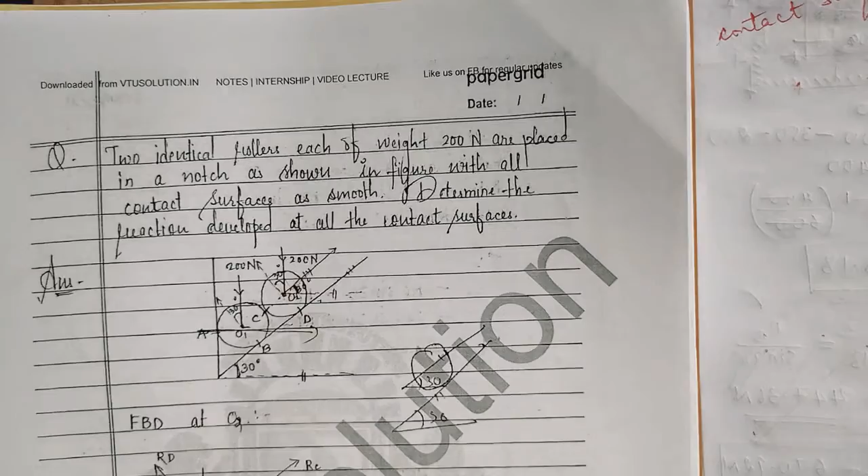Two identical rollers, each of weight 200 Newton, are placed in a notch as shown in figure with all the contact surfaces as smooth. Determine the reaction developed at all the contact surfaces.

So two spheres are there, identical rollers are there, and they are inclined at 30 degrees.

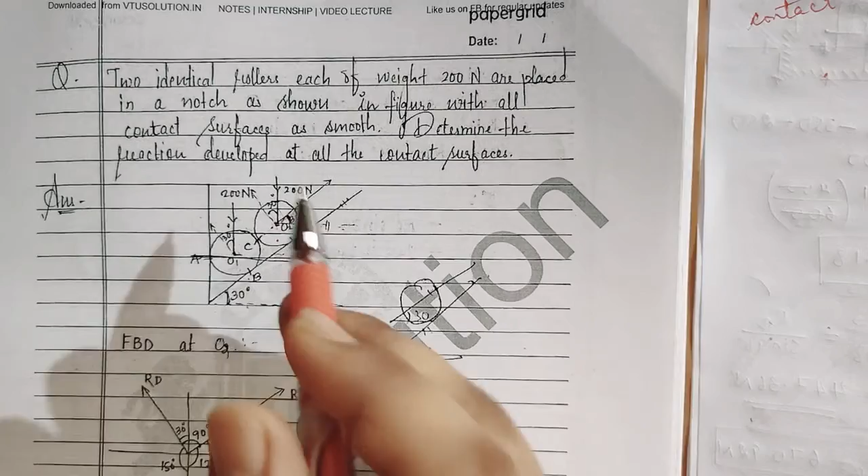Okay, so I will rewrite the figure here. So I have rewritten the figure.

So what do we have to find? We have to find the reactions at all the contact surfaces: AL contact, BL contact, CL contact, DL contact. So ABCD is the contact surface.

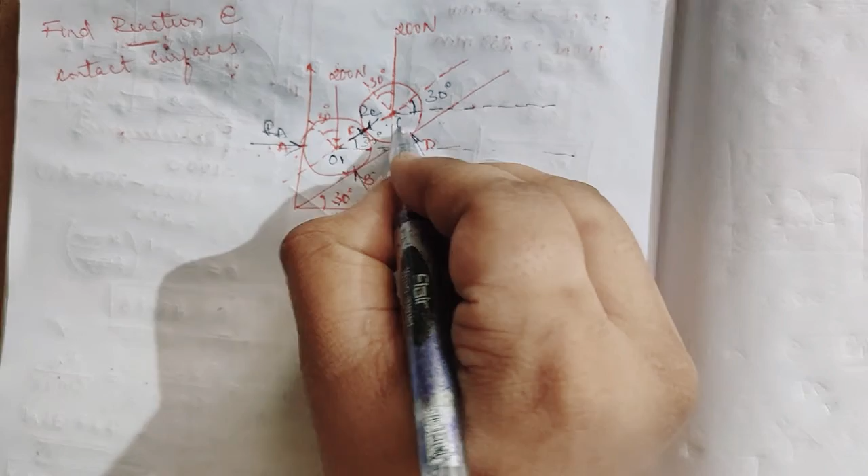So let us assume this center as O1, this center as O2. So similarly we'll take the FBD, free body diagram.

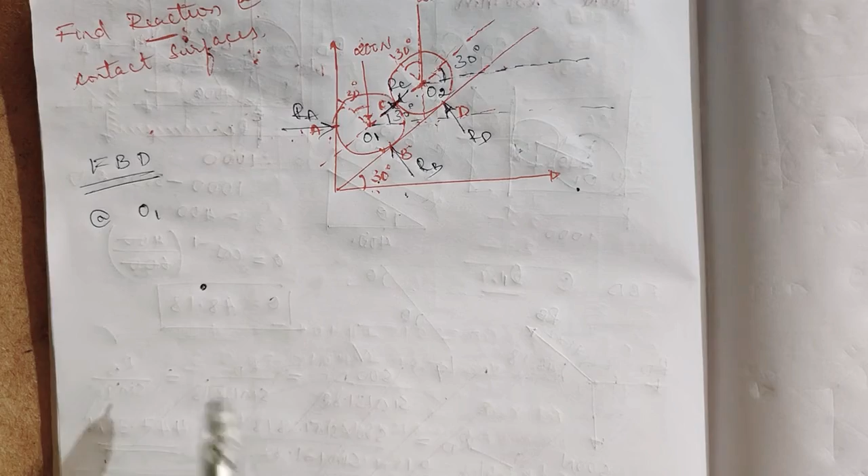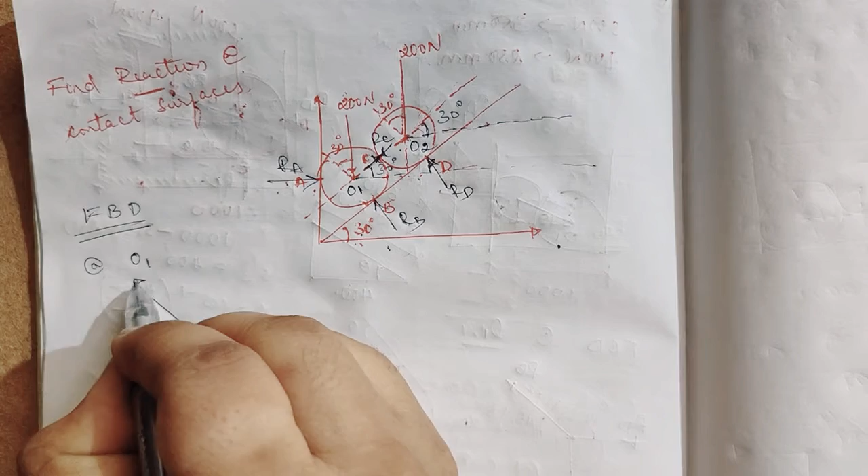First, then we will take RD. So RD, I already have one going upward, so I will take the tail here and in that direction only I will make it. So this is RD, head to tail, so only tails are connecting.

Now another force is RC. If I take RC here, then head will be connecting. So what I'll make, I'll take this RC as this. Okay, same force, what we are doing is just connecting the like terms.

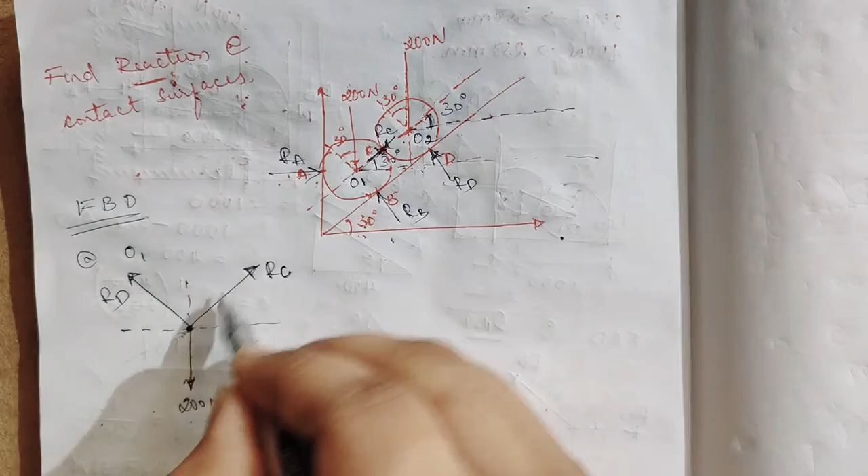Okay, now the angle—this one, RC, where is it joining? No, this is RC because it has the same centers, identical spheres. What is this angle? This angle is 30 degree. So this is 60 degree, because the total is 90.

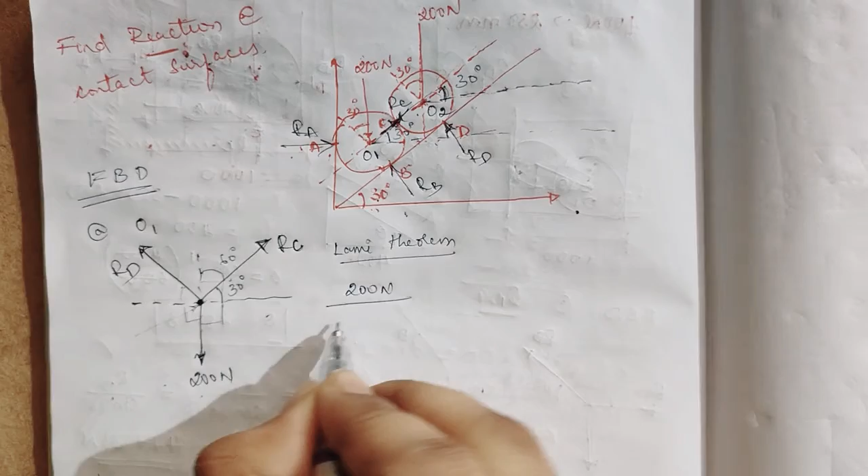What we want now, by applying Lami's theorem: this 200 Newton divided by sine of the opposite angle. We also want this angle—at what angle the weight is applying on this sphere, it is also 30 degree.

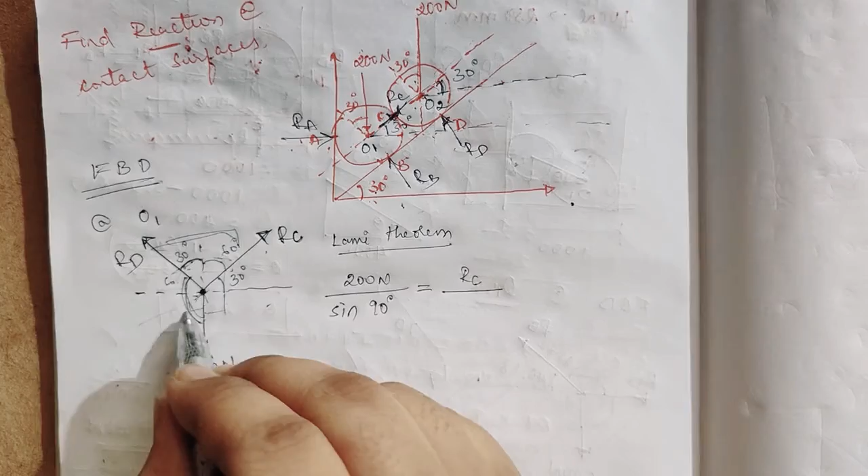So it's given 30 degree, so 30 degree plus 60 degree, total is 90 degree. So sine 90 degree is equal to RC divided by this angle. This is 60 plus 90, 150 degree, which is equal to RD divided by 30 plus 90, sine 120 degree.

Now as usual we will find RC. How to find RC? Just cross multiply: sine 150 into 200, divided by sine 90. So it is 100 Newton is the RC force.

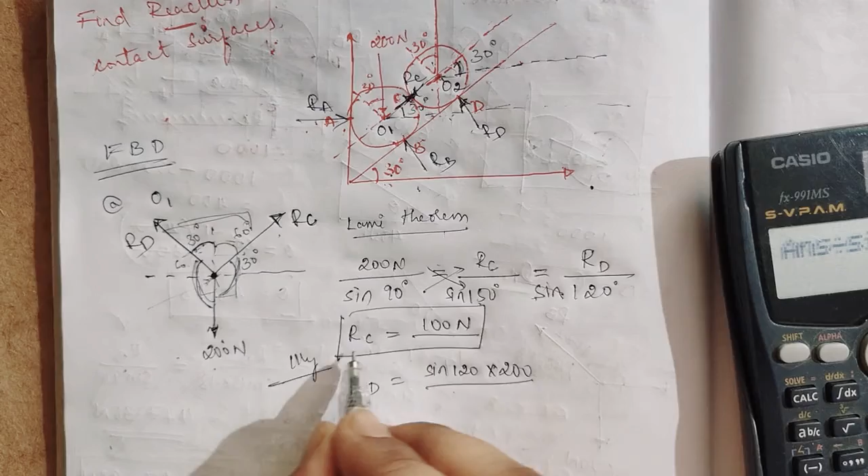So similarly RD is equal to—how to find RD? Sine of 120, please don't neglect it. So sine of 120 into 200 divided by sine 90. So sine 120 into 200 is 173.20 Newton. Sine 90 we know that is 1. So we have found RC and also RD.

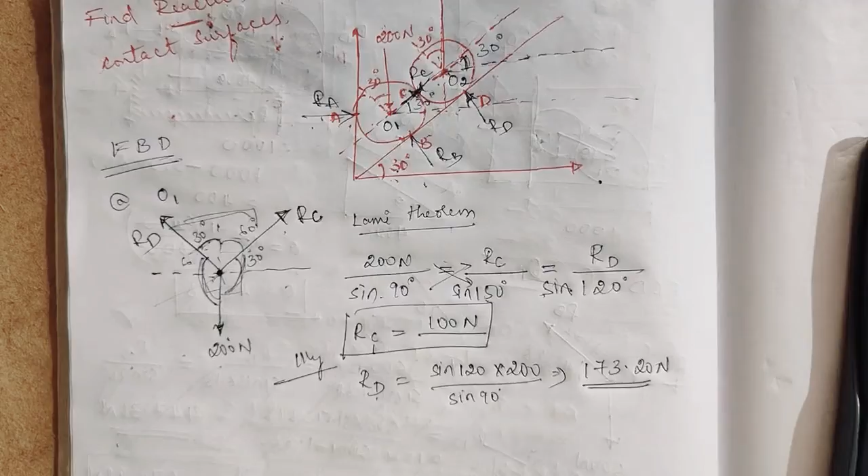Now we will take FBD at O2. We'll take FBD at O2.

So what can we take? See here, I'll write it here. First I'll write the weight. How much is the weight? 200 Newton. Next, RC is there, so I'll write RC here only. Before that, we will see what else is there.

RA is there. RA is inclined. Here we are not taking inclined, here we are taking the horizontal. What is the force acting on that figure? So RA force is left to right, I'll take it from here. So left to right I will take this RA force.

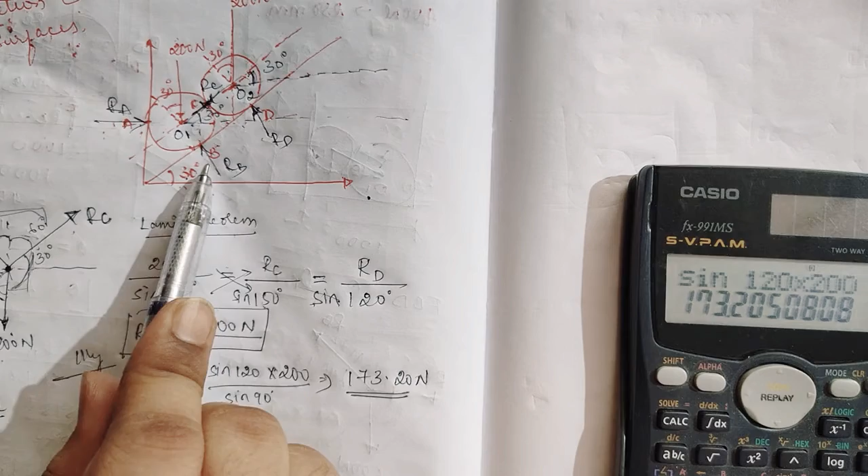Then what are the forces? Then RB—here B is there, so I'll take RB, that is inclined at 30 degree, right?

So I'll take RB, this will be my RB. Next what we have, RC. So we have to take RC like this, right? So for this circle it will be like this. RC will be like this. Now we will apply the axis.

So we know this is 30 degree, and this is also 30 degree, because it will be opposite angles, 30 degree. RA, RC, RB 200 Newton. So we will apply the equilibrium concept, what is that? Sigma H equal to 0, summation of V equal to 0. So before that we have to resolve the forces for RB and RC.

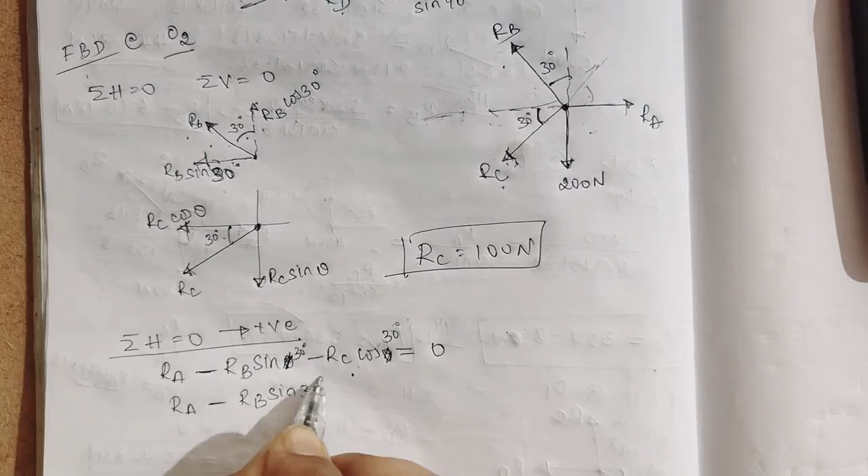This is not theta, this is 30 degree. So we write RA minus RB sin 30 degree. RC value we know is 100 Newton, so I'll write cos 30. So RA minus RB sin 30, under is...

Sin 30 is 0.5, so 0.5 into RB, minus RC we know 100, cos 30 is 0.86, so into 100 it is 86.60, is equal to 0. So RA minus 0.5 RB is equal to 86.60. Take this equation as 1.

Now summation of vertical force is equal to 0, taking upward as positive. So I can write on the next page, but for the diagram I have to come back. Therefore see here, I'll write the equation only, I'll solve it on the next page.

So what are the vertical forces? 200 force is vertical, RC vertical, RA, and RB's vertical component. So we have three forces. It will be 200 Newton, but it is not 200, it is minus 200. Then minus RC sin theta, then RB component is upward, so that is plus RB cos theta, is equal to 0.

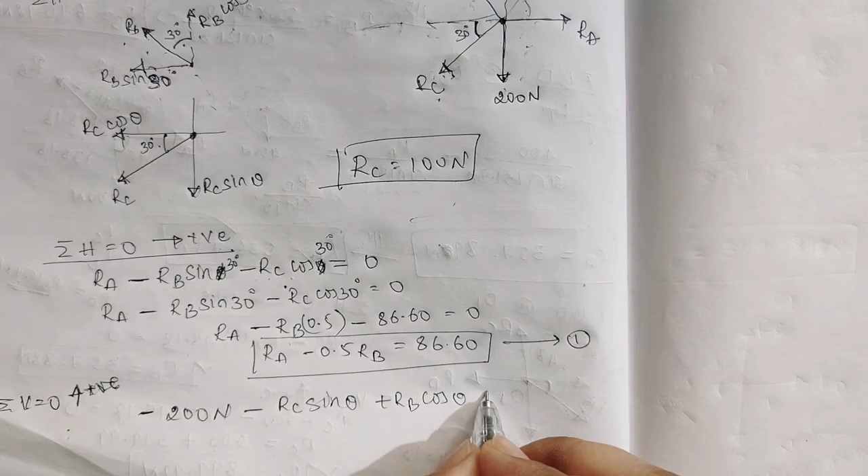So what it will be, take theta as 30 degree only, direct value. First I will write the positive terms: RB cos 30 degree minus RC sin 30 degree is equal to 200. I'll take this equation on the next page. So what is the equation?

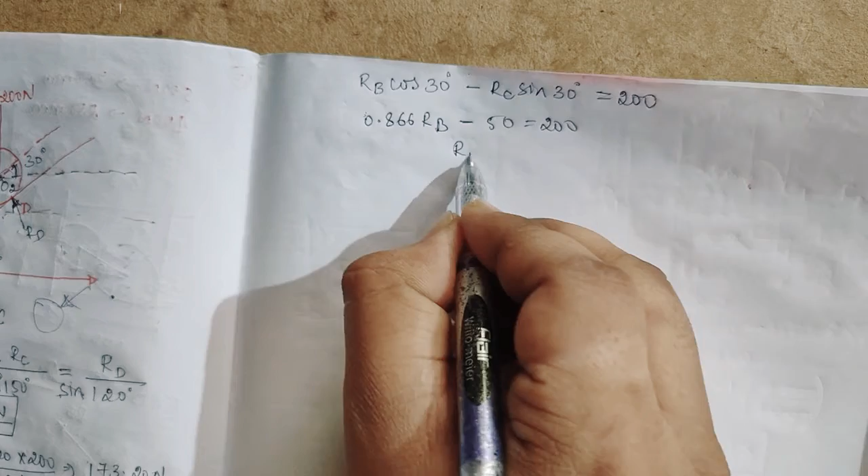RB cos 30 degree minus RC sin 30 degree is equal to 200. So let's solve it fully. Cos 30 degree is 0.866 into RB. RC we know is 100, so 100 into sin 30 is 50, which equals 200. So RB we will get: 200 minus 200 plus 50. When it goes to that side, it becomes 200 plus 50 divided by 0.866.

What is the value of RB? RB will be 288.68 Newton. So putting this value in equation number 1, what do we get?

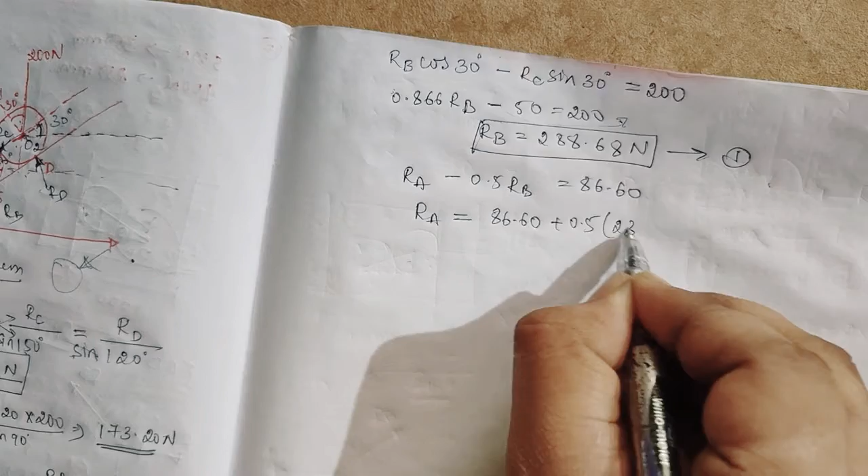So RA minus 0.5 RB is equal to 86.60. Now we want RA, so 86.60 plus 0.5 into 288.68, which will give us 288.68 into 0.5 plus 86.60. Your RA will be 230.94 Newton.

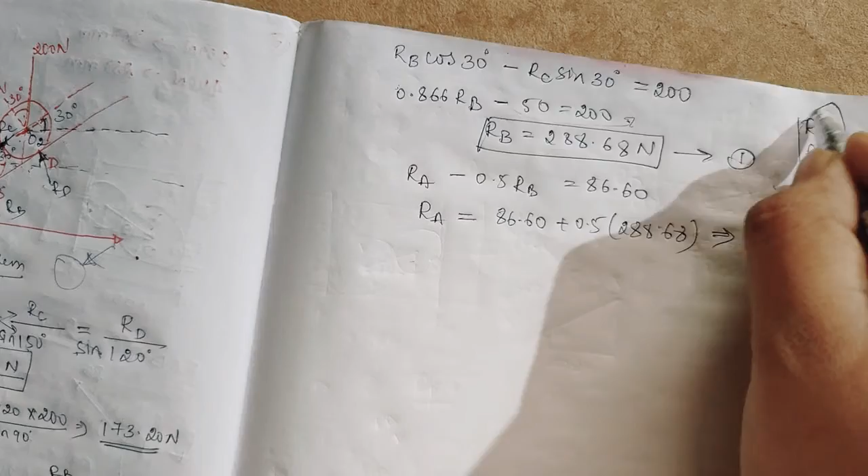So we found RA, RB, RC and RD, all the reactions at the contact surfaces. So this was one of the examples. Now we'll see the last problem of this lecture.

So the last problem: two smooth circular cylinders, each of weight 1000 Newton and radius 200 mm, are connected at their centers by the string AB of length 400 mm and rest upon a horizontal floor, supporting above them another cylinder of weight 2000 Newton and radius 150 mm.

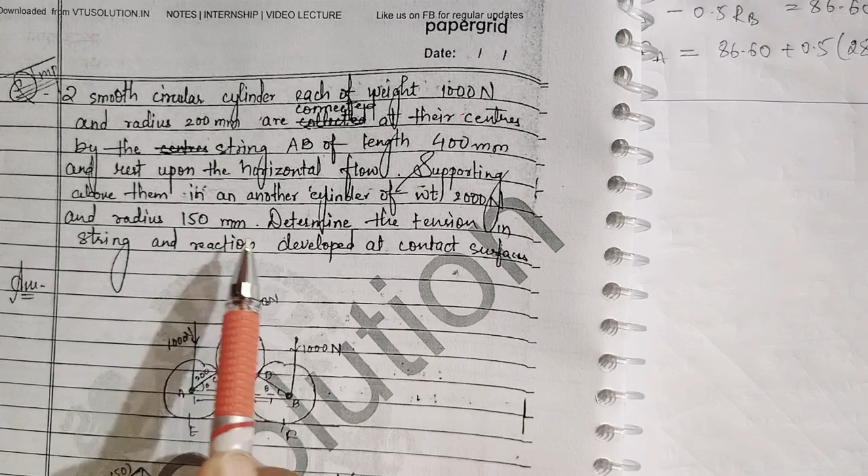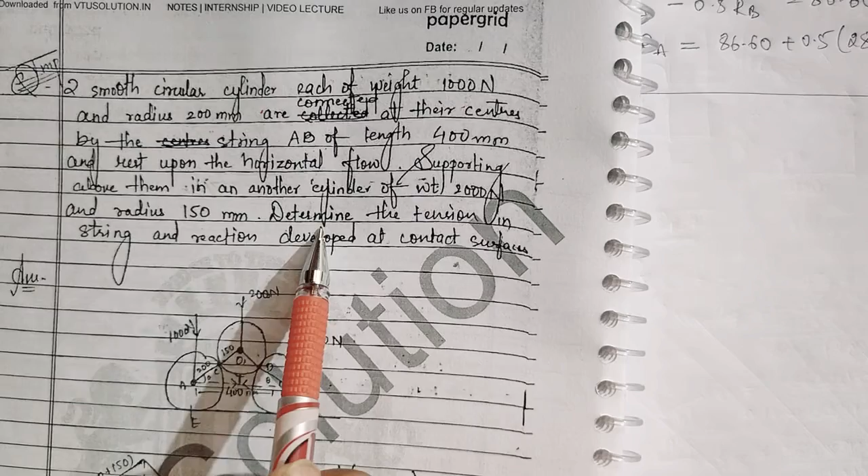Okay, two spheres are there. Determine the tension in the string and reaction developed at the contact surfaces. Let me read again: two smooth circular cylinders, each of weight 1000 Newton and radius 200 mm, are connected with the string AB, and its length is 400 mm, and rest upon the horizontal floor. Supporting them, another cylinder is kept on top with weight 2000 Newton and radius 150 mm. So determine the tension in the string and reaction developed at the contact surfaces.

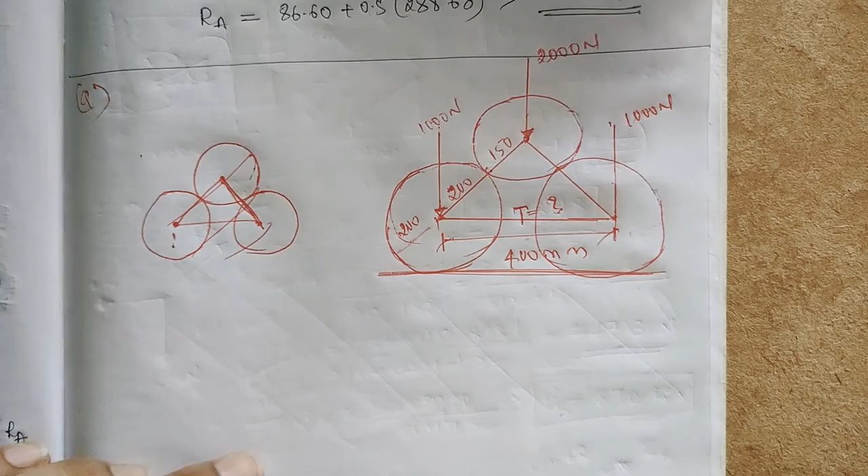So I'll draw this figure as given in the book. See here, this is the figure. Okay, I have redrawn it. So two circles, two cylindrical spheres. I have given you the PDF; in that you can see the question again.

Okay, two circles are there, and these are identical circles. Above that, another circle is there with radius 150. The identical circles have radius 200. So weights are given for each of these identical circles: 1000 Newton, 1000 Newton, and the top circle is 2000 Newton. Now we have to find the tension in the string and also the reaction at the contact surfaces.

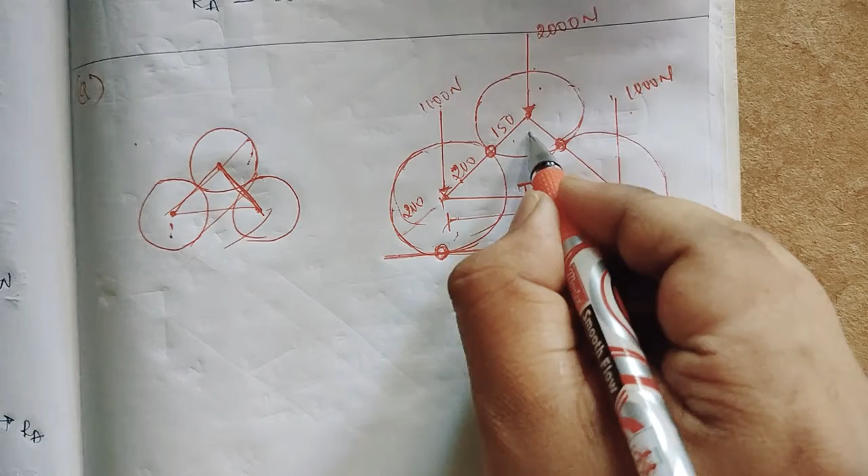So there are two contact surfaces to find reactions at. So what we can do now: since this is 400, I'll take one imaginary line here, obviously at the center, and this would be 200 mm, this would be 200 mm. So we got a triangle here. I am doing this because I want to find theta.

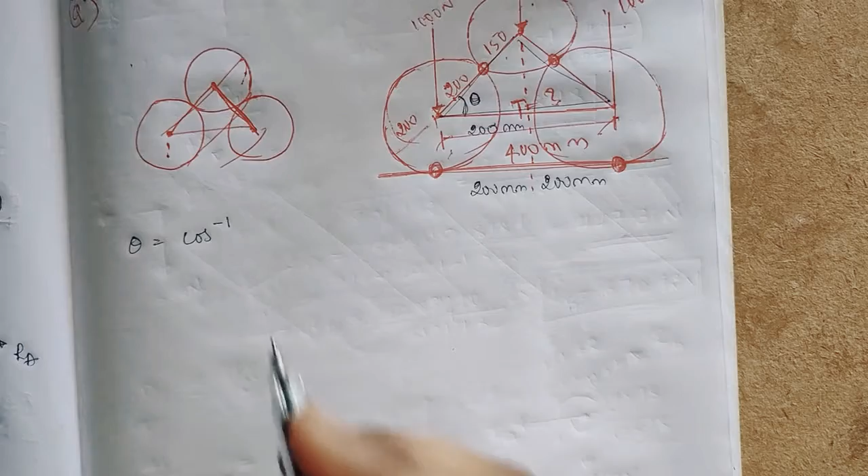So theta is equal to: we know this is 200 mm, and adjacent and hypotenuse we know, so it comes directly to cos inverse of the adjacent angle: 200 divided by 200 plus 150, which is 350. So 200 by 350, cos inverse of that gives theta equal to 55.15 degrees. So this was about theta.

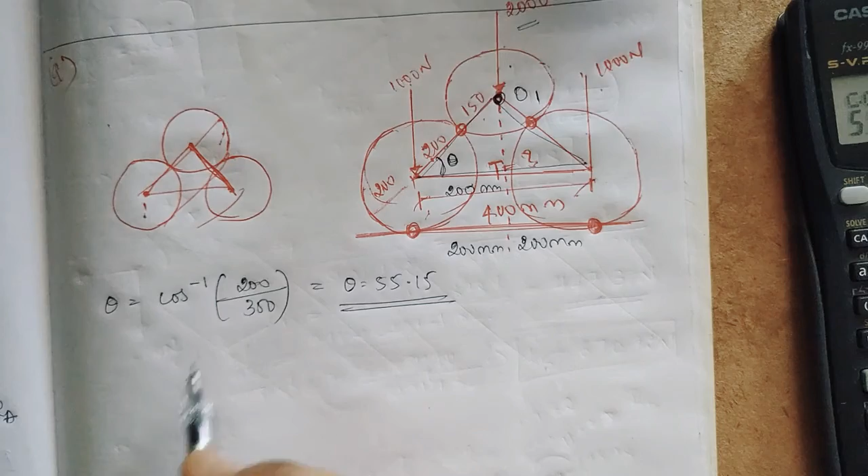Now we can take the free body diagram at O1. I will take this as O1. So if I take the free body diagram at O1, what do we get? Take this as center. What is the weight here? 2000 Newton. Then what are the forces there?

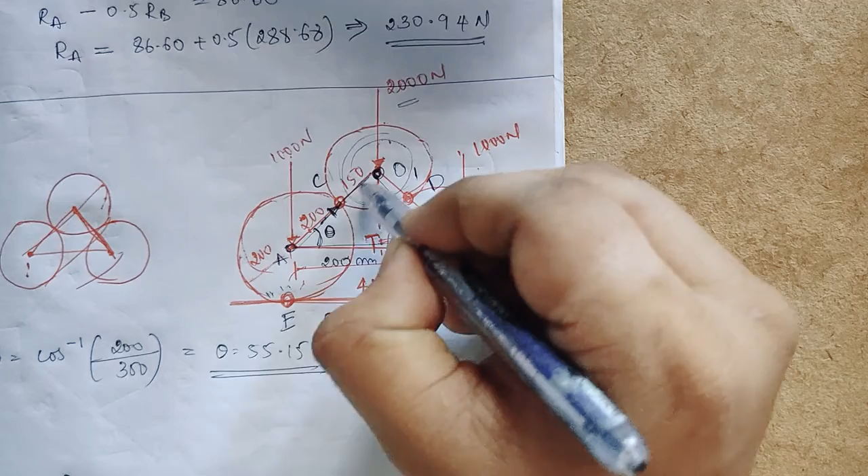Now another important thing: this is the circle, and here we have to find the reaction. I'll name the points C, D, E, and F, and these points will be A and B, and this is O1. For this sphere, the reaction will be like this: RC reaction, the outer reaction. For this sphere, RC will be like this from the outer, and for this sphere too. So taking it tail to head, I will take RC like this.

After RC, what do we have to take? RC and again is D. So RD reaction will be like this - this is the surface, this is normal to that surface, like this. So tail is here, head is here, I'll write in the same alignment here. RD I'll take in this direction, tail here, head here.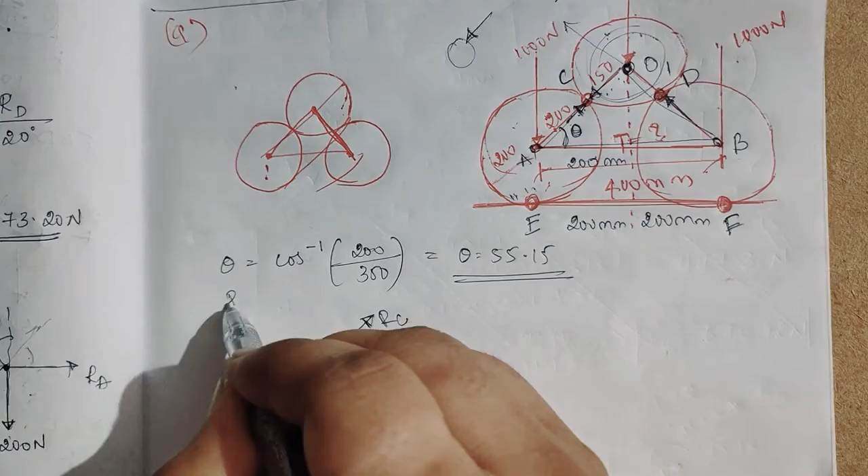See here in this figure, the sphere is like this. RC, C point is here, D point is here, so C point will be like this. Normal to the surface reaction. D is also normal to this surface. Because of the calculation, I will take RC like this, and this will be RC, this will be RD.

Again another one is the weight, that is 2000 Newton. I'll introduce the axis. Now we have to find theta. Already we have found theta, that is 55.15 degree.

Now, from our PUC, see, if two lines are parallel, then if this is theta, this is also theta. Same way, I'll assume an imaginary line parallel here. So this parallel is nothing but this one. So if this is theta, if this line goes on, this line is nothing but your RC. So this will be also theta. So what is theta?

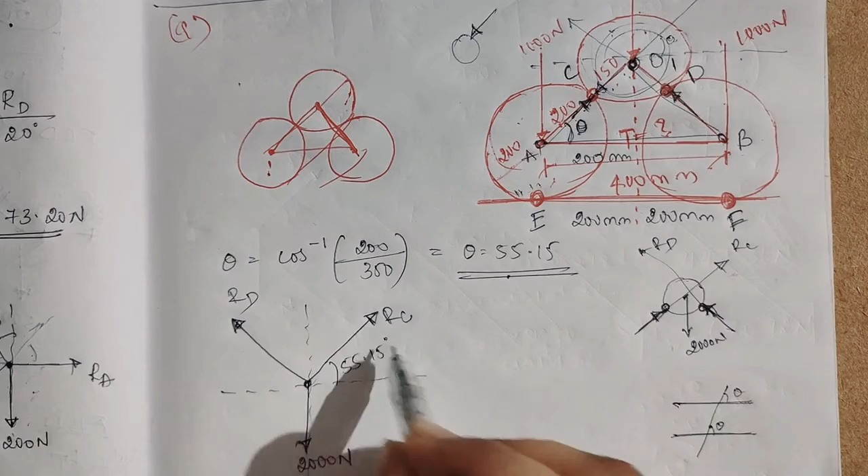55.15 degree. Now similarly, if we observe this triangle, it is an isosceles triangle, because these two circles are identical, so the radius is also same, two sides are equal, meaning they are isosceles, right? So two angles will be equal - if this is theta, this theta is also 55.15 degree. So if this is 55.15, by the same concept, this will be 55.15 degree.

55.15. So we have three forces. So what we want here is this force, this full force, this full force, to apply Lami's theorem. Now we will apply Lami's theorem.

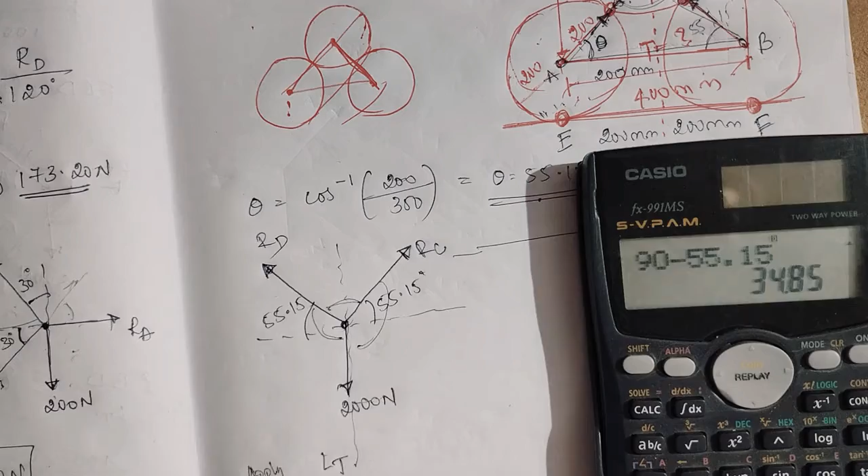See here, before that we will calculate all the angles. So 90 minus 55.15, it is 34.85. What about this? Same 34.85. So 34.85, it will be 69.7. So what is this? This is nothing but 90 plus 55.15, it is 145.15. So it will be the same, 145.15.

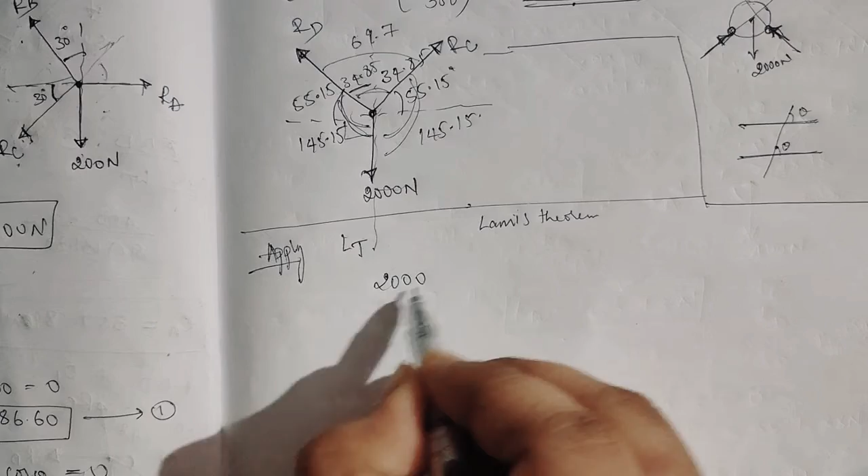Now by applying Lami's theorem - how do we define Lami's theorem - force divided by sine of angle between the other two forces. So I'll take force 2000 Newton divided by sine of angle between other two forces, meaning 69.7, which is equal to RC divided by sine of 145.15, then RD divided by sine of 145.15.

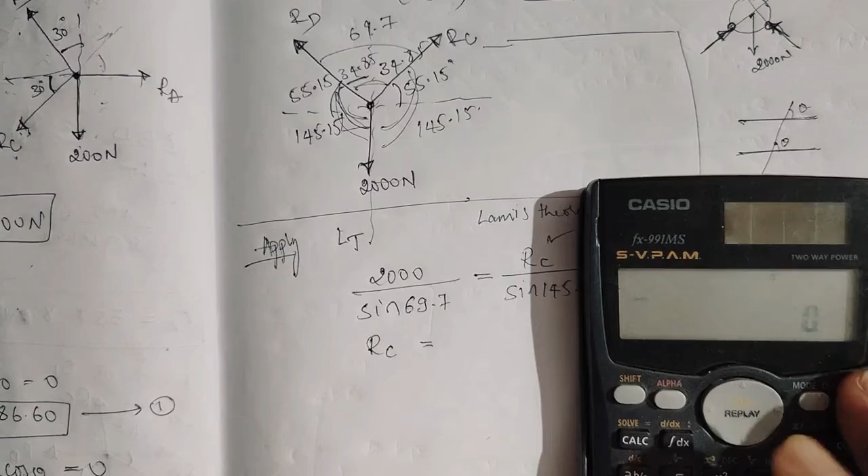Now we can find RC and RD by previous methods. How? I'll write directly RC is equal to - once you know the concept you can solve it directly. See RC is equal to, so I will divide 2000 into sine 145.15, divided by sine 69.7. So our answer will be 1218.54.

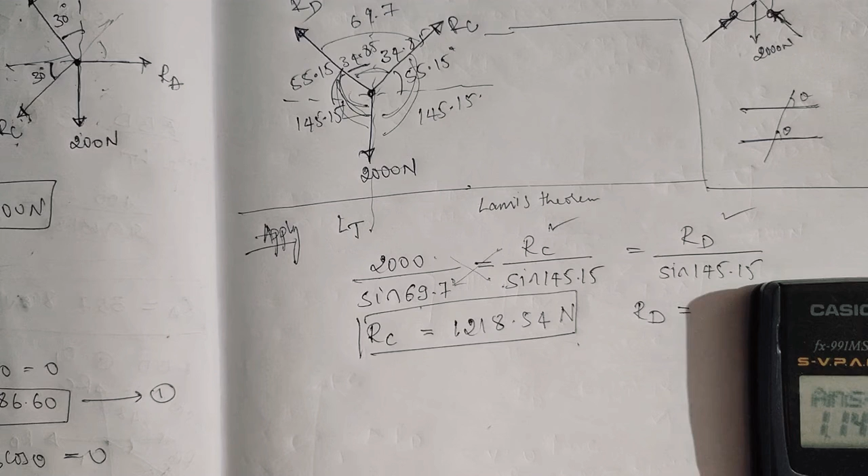1218.54 Newton. Similarly, your RD is equal to 2000 into sine 145.15 divided by sine 69.7. Most probably we will get the same, 1218.54 Newton. So RC and RD we got the same.

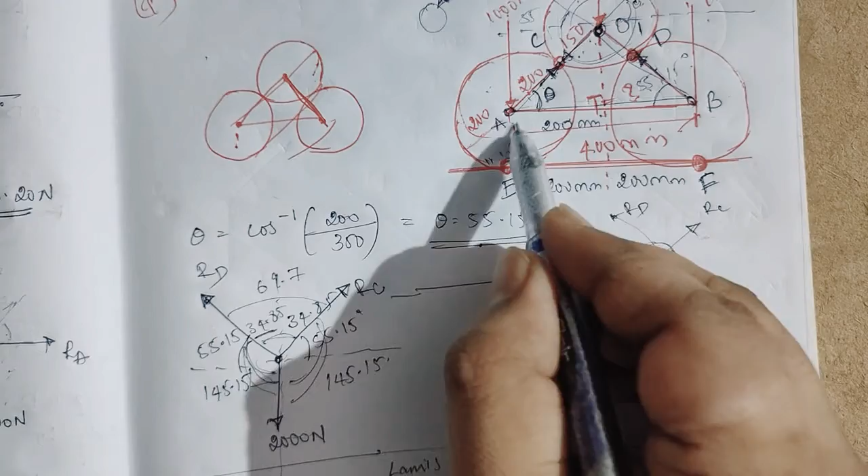Now what we should do - we have found the contact surfaces at C and D. What is remaining? We have to find T, we have to find E, we have to find F. So we will take another free body diagram at A. So FBD at A - I'll take here, FBD at A.

So this is your A point. See here, this is A point. I will write here for your understanding, so I'll take this point as A. So I'll take first the weight, 1000 Newton. Then we have RE.

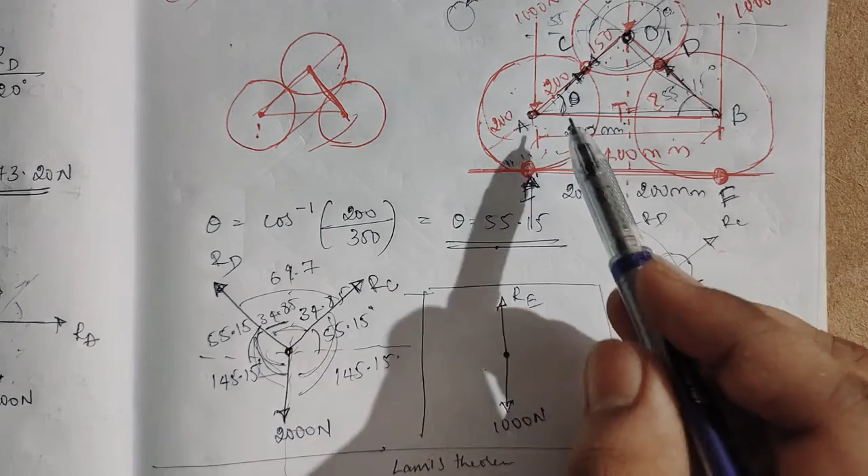This RE is normal to the face, meaning how it will be - like this. So already we have tail here, head here, so I'll take it upper. So this is RE. Then which forces are there? Here RC is there, right? So RC will be for this, it will be from outside. So I will take here, in the same direction, take RC.

Okay, now apply the axis. We know that this angle is 55.15 degree by same concept. Okay, so we have RE we have to find. Okay, then what we can find? Yes, only RE we can find, and here we have to also find T.

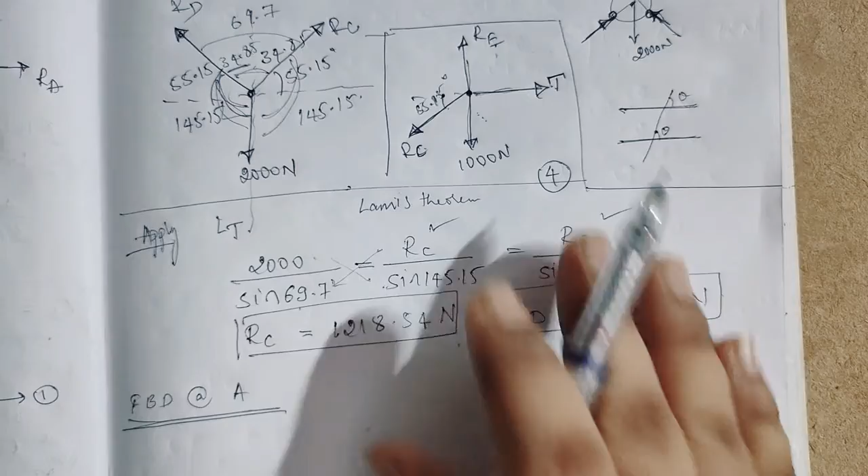So this is nothing but the force T. 1 2 3 4. So we have 4 forces, so we can't apply Lami's theorem. So I will write this figure in the next page. Okay, wait, so I have written in the next page. Now 55.15, this is what

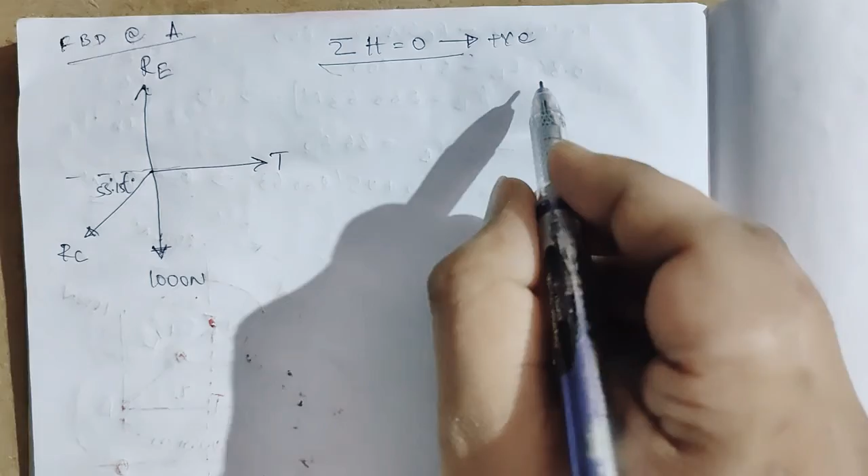FBD at A. So we'll apply, we can't apply the Lami's theorem because there are already 4 forces. Because there is already 4 forces, so we can't apply the Lami's theorem here. Sigma H equal to 0, taking left to right as positive. So when you write this, you should come to your mind that any inclination force are there or not. So we have one inclination force, we have to resolve this.

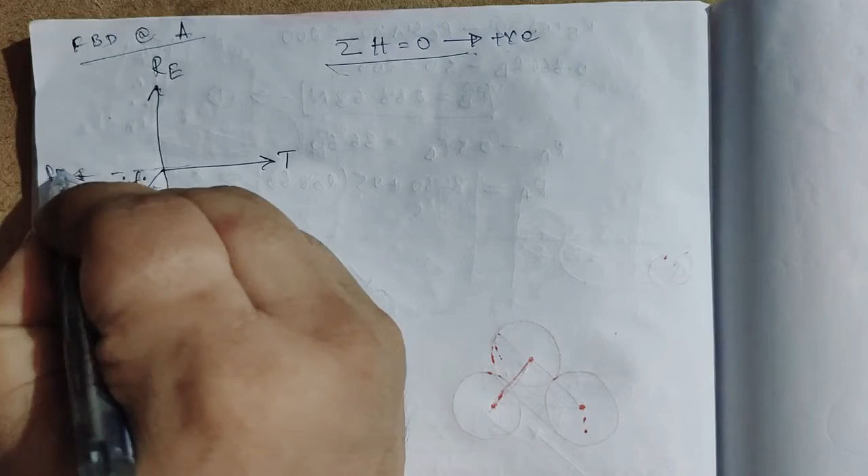How? So direction is downwards, one will come here, that is RC sine, and again the adjacent one becomes RC cos. So RC cos 55.15, here another force RC sine 55.15. Okay, fine.

Now sigma H equal to 0, taking all the horizontal force equal to 0. Okay, taking left to right as positive. What I will do, I will first take T as it is positive, T. Next minus RC cos 55.15, then what we have, any other forces, horizontal forces? No.

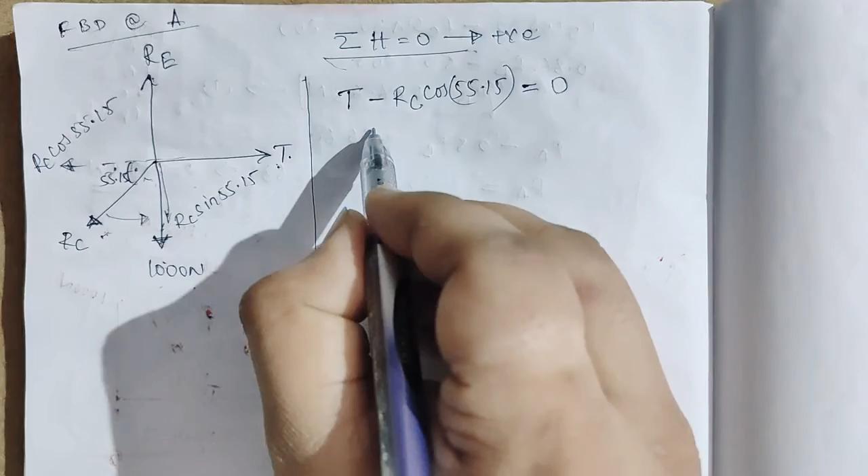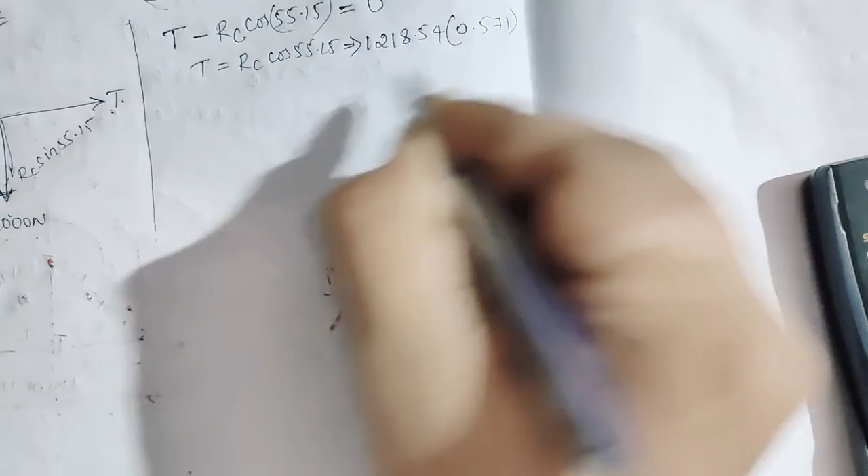Then what we have to do, then T is equal to this RC cos 55.15, which is equal to, we have already find what RC is, 1218.54, right? So RC is 1218.54 into cos 55.15, so it is 0.571, so your T will become 1218.54 into 0.571, so 695.7

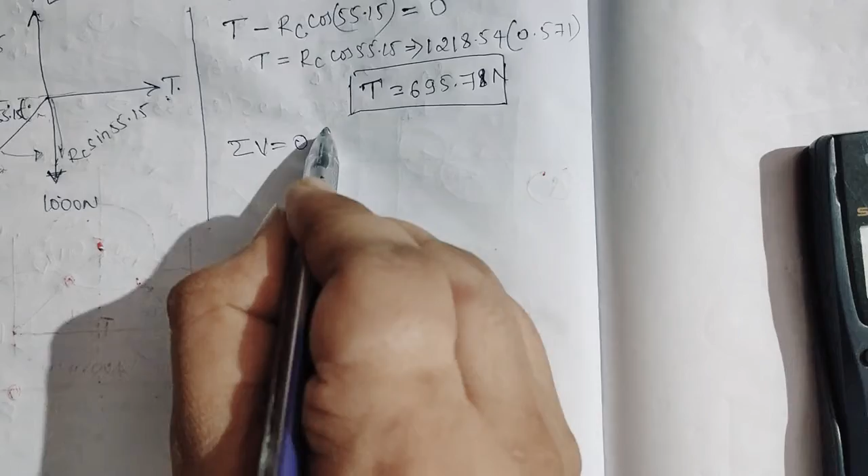Or 78 Newton. So we found T. So we, in all the forces we have to find also the T. So we got the T. Now summation of vertical forces equal to 0, taking upward as positive. So what are the upward forces? So RE is upward, so no problem, it's positive.

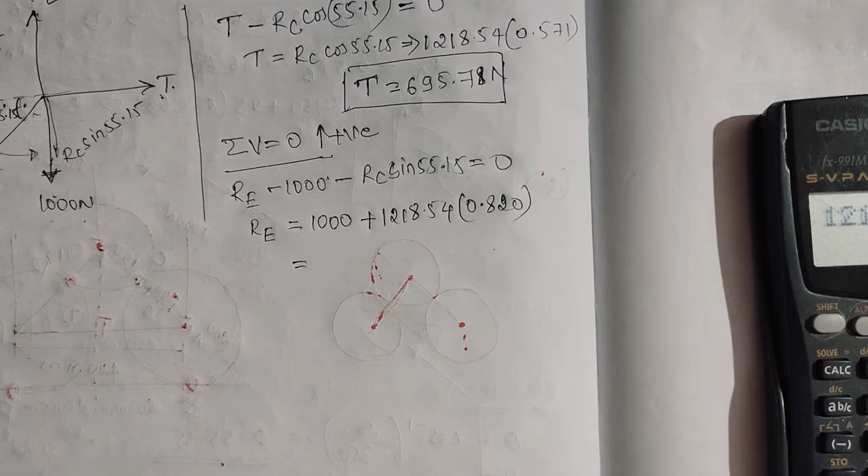Next, minus 1000 Newton minus RC sine 55.15. Another force, no forces, 0. Then RE is equal to 1000. I will take that side, 1000 plus RC, 1218.54, so sine 55.15, it is 0.802, 0.820. So now calculate 1218.54 into 0.820 plus 1000, it will be

1999.20 Newton. So the force RE is 1999.20 Newton. So what are that we have to find? We have to find RC, we found it. RD, we found it. Then RE, we found it. T, we found. What is remaining? RF. Okay, for this RF, what I do, see,

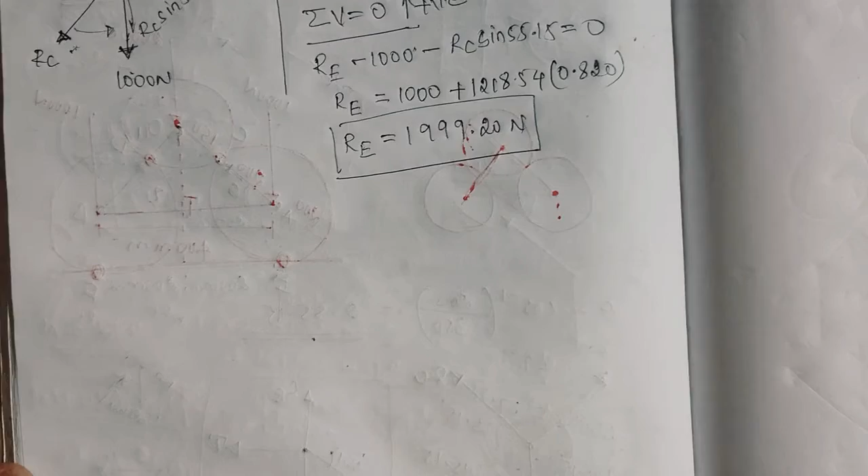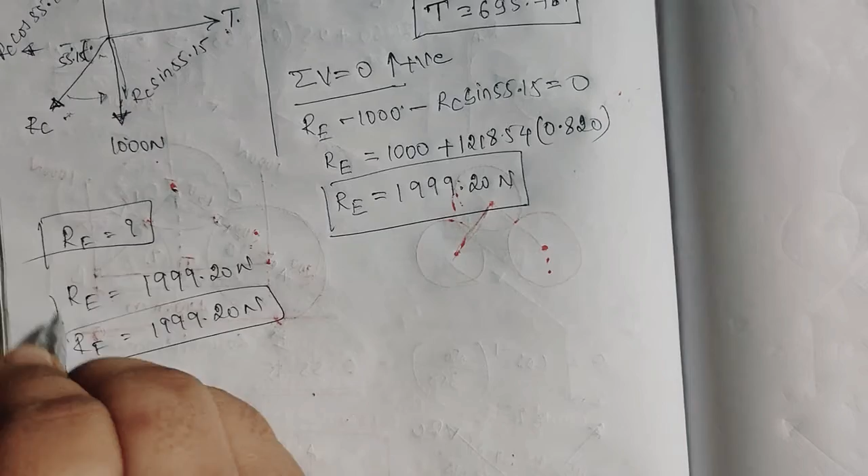So we got RE. Now we have to find RF. So by common sense we can tell that if RE is 1999.20 Newton, RF will be same, 1999.20 Newton, because they are identical, angles are same, distances are same, so same force will be experienced by both the points here, both the points. So if this RE is 1999.20, this will also will be same RE.

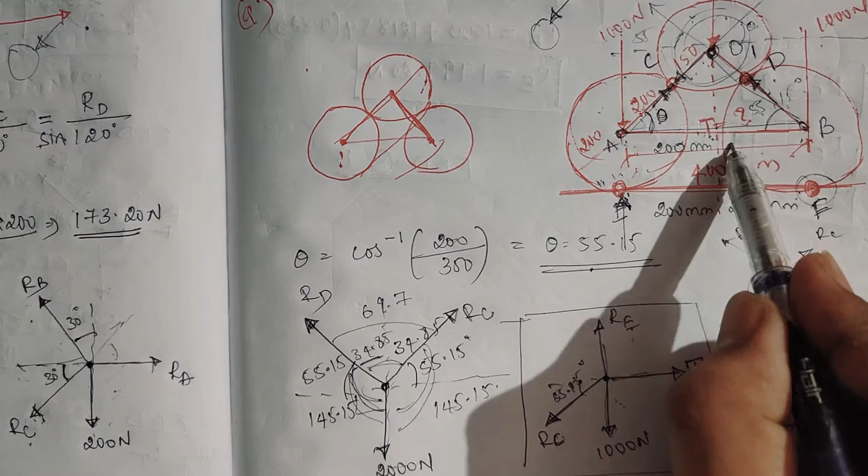I'll show you by solving if you want. Okay, so what to do to solve? Just I'll take FBD at B. I'll take FBD at B. So what are the forces I am getting? I'll get 1000, T, RD and RF. So this is B, I'll get 1000. Okay, so T will be this side.

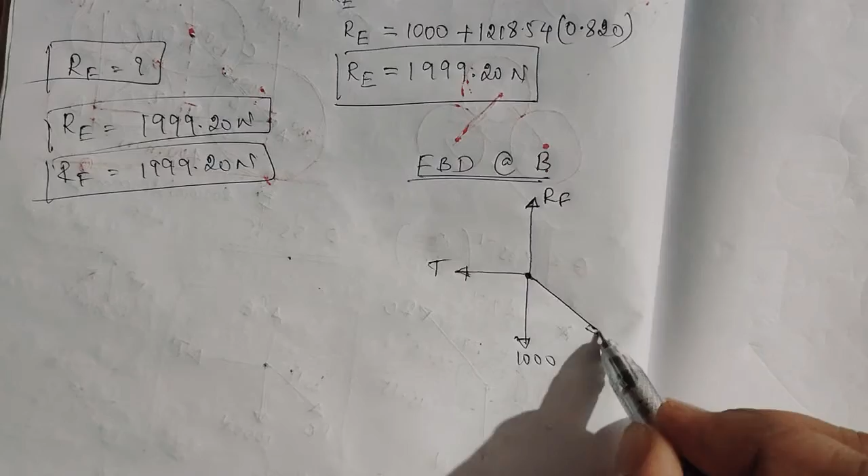Now T, same opposite of that, FBD at A you will get. Okay, FBD at A is there, no? So here RF, then the other force is RD we will take here. So I'll apply the axis, this is 55.15 degree. So all the values we know, we just have to compute.

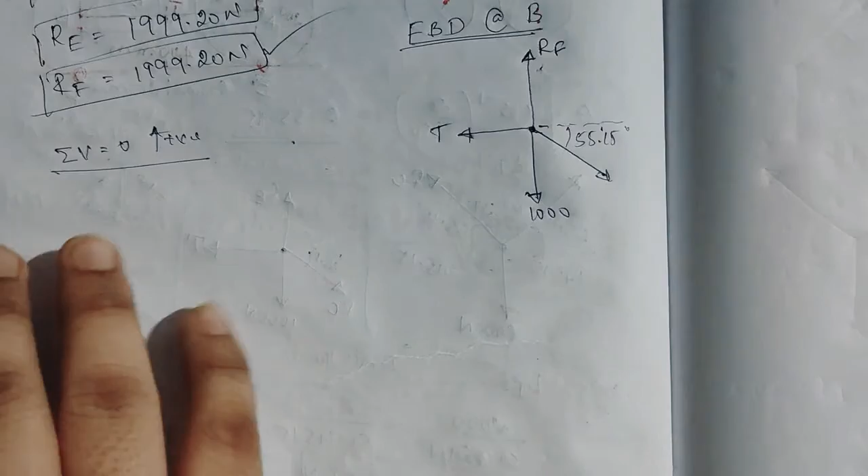So just we will take where RF will come. RF is what? Vertical force. So I will directly do one thing. It is summation of vertical force equal to 0, taking upward as positive. This is for only the checking purpose. Okay, already we got this by common sense, but I'll prove you how now.

So I'll take only the vertical forces. RE, because it is positive, minus 1000, then this is RD, right? Yes, RD. So the vertical component will be RD sine theta, which equals 55.15, is equal to 0.

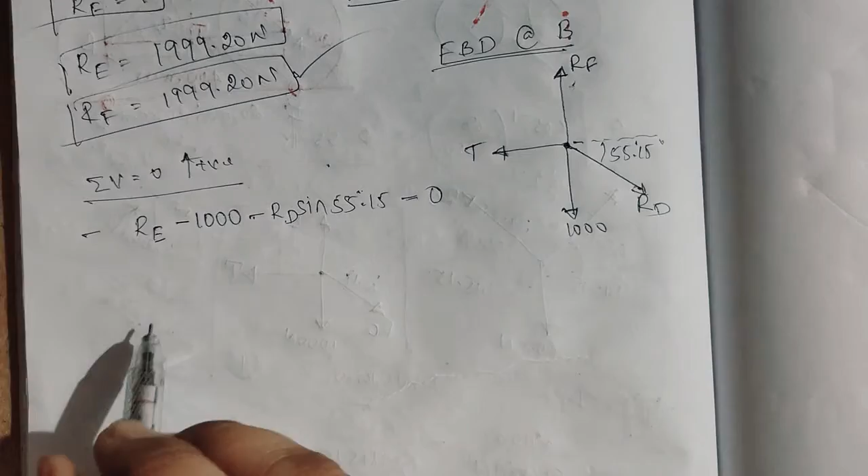Sorry, this is RF. Now RF is equal to, I'll transfer all to that side, 1000 plus RD sine 55.15, therefore 1000 plus 1218.54 into sine 0.820. Same, you see here we got the same value.

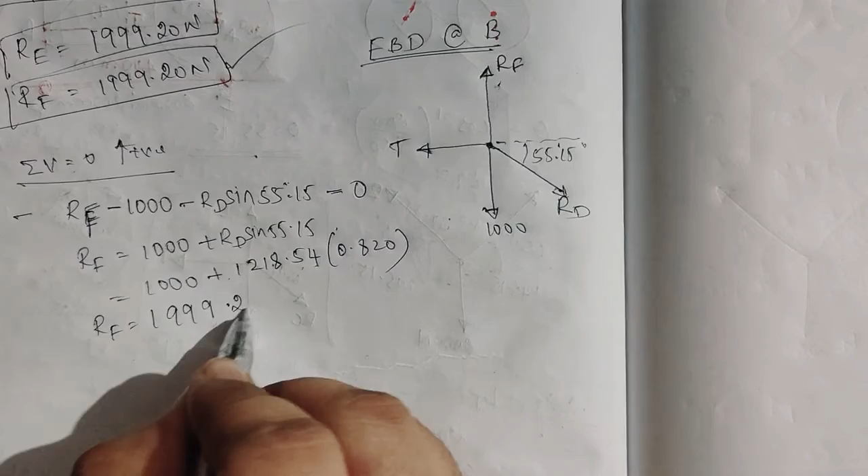See, with this value, this is same. So RF will be 1999.20 Newton. So this is how we solve the problem for equilibrium and Lami's theorem concept.

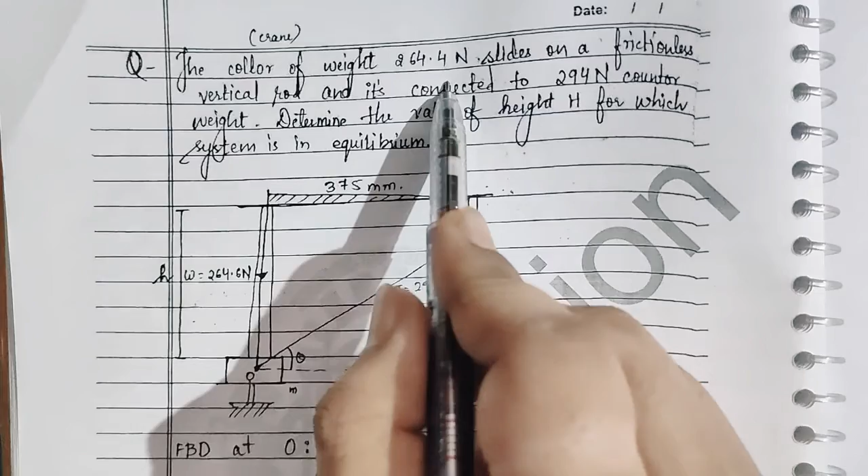We will solve another one, the last problem. So see here, the collar of weight 264.4 Newton slides on a frictionless vertical rod and it's connected to a 294 Newton counterweight. Determine the value of height h for which the system is in equilibrium.

So this is the system in equilibrium.

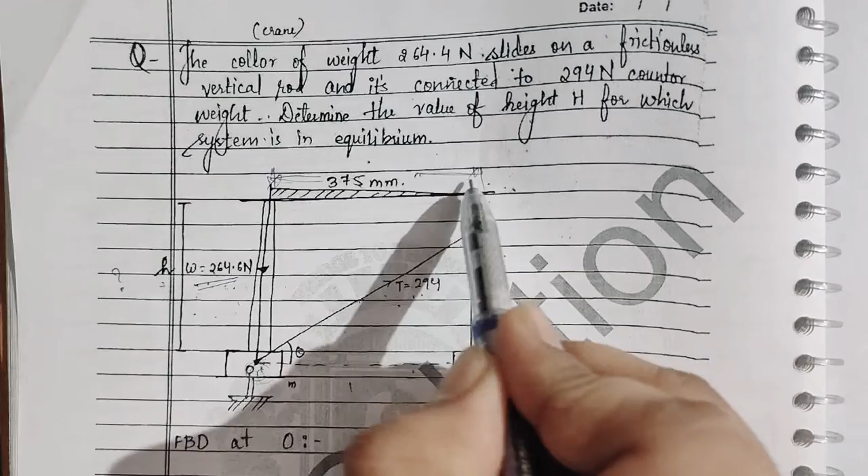Okay, so I'll write the same. I have written the same diagram.

375 mm is the distance. Weight is 264. So let this be O. I'll take FBD at O.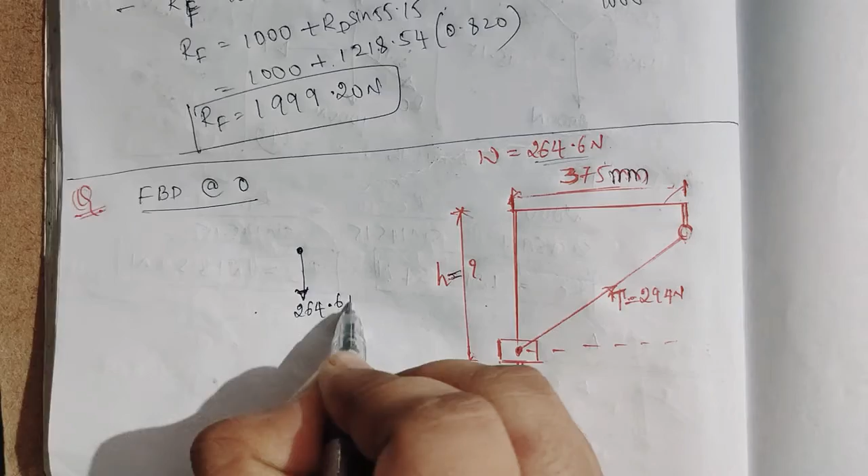So what is the weight? Weight is 264, it is always downwards. So I'll take 264.6 Newton.

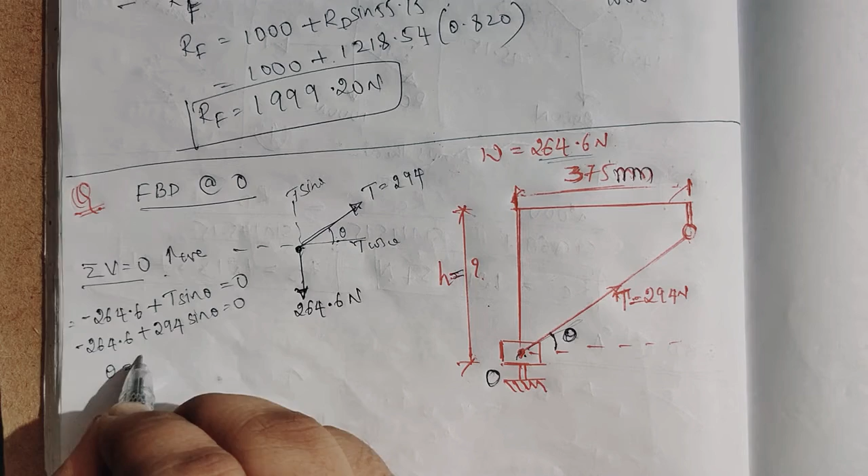I'll send that side. Okay, 264.6 divided by 294. This is sine theta. So sine theta is equal to what? I'll send this, same simple mathematics. Now theta is equal to sine inverse of 264.6 divided by 294, so that will be 64.06 degrees.

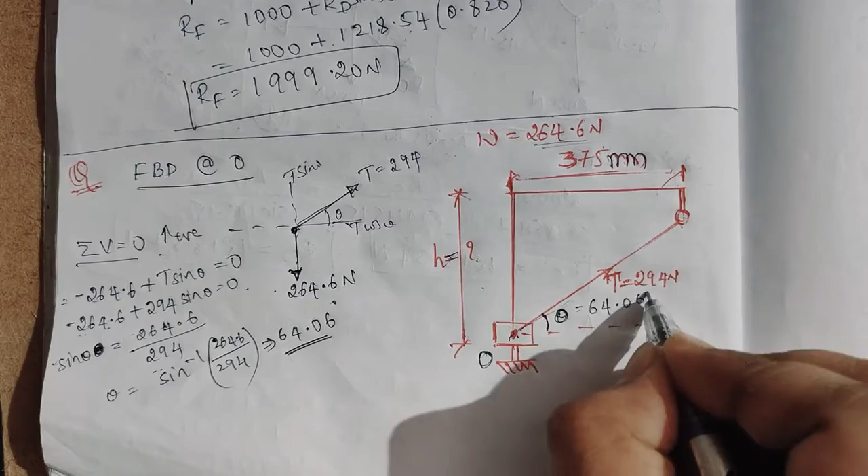So this is theta, 64.06 degrees. Now what is this? It's 90 degrees. So 90 degrees minus 64.06, how much will we get? 25.94.

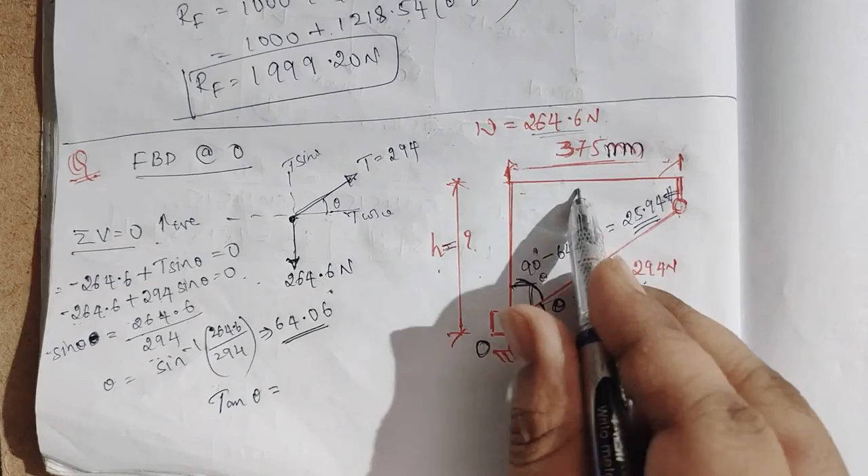25.94 degrees, this angle is 25.94. Now to find h, which concept will we use? We will directly use tan theta. Tan theta means opposite by adjacent.

Tan theta, opposite is how much? 375 divided by h. So what happens? h is equal to 375 divided by tan of 25.94. So h is equal to, calculate my dear friends.

So tan 25.94, 375 divided by that, the answer is h is equal to 770 meter.

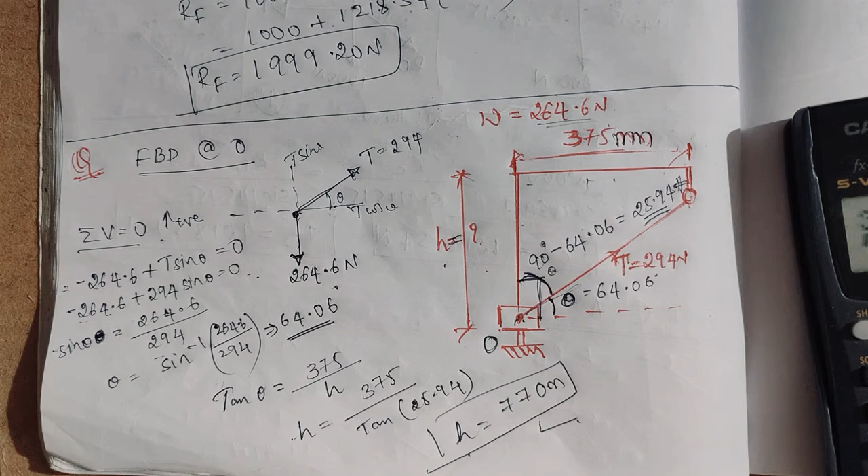So by this way we can use the concept of equilibrium of forces to find the height. So when you think of application, you will find out why this type of problem has been given. So from this I'll conclude this lecture. We have solved all the problems coming under Lami's theorem and equilibrium forces concept. Okay, thank you.